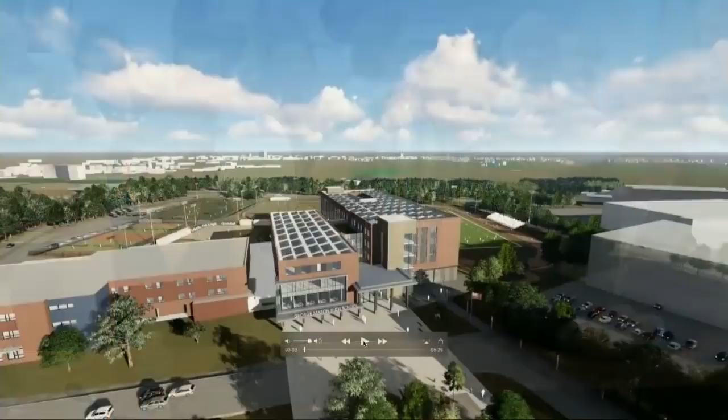This just looks at the building from the 5th floor apartment of the future mixed-use development. Looking at the building, you see the plaza there in front of the new high school.

That plaza extends into the good neighbor space, which is 300 spaces of parking required by the school, also could be shared by the development. We're hoping that at some point, if there could ever be structured parking, you could imagine a true community green space in that area where parking is currently proposed.

You can also see by leaning the road away from the school how much yard and frontage you actually create. Right where the blue stair area is, that's the current loading dock. By taking the loading dock out and restoring that to yard, you create more space between the traffic and the building.

All of that can be very nice queuing space for buses in the afternoons. So a lot of attention was given to the arrival and experience of coming and going every day by students, staff, and visitors, and the face it presents to the community in the future.

From a massing standpoint, the middle school is a 3-story structure, and the building is simply two academic bars, a very simple diagram. One is 4 stories and the other is 5 stories.

You can also see in this view all of the PV panels that would go toward making up that 25% power generation toward net zero. The new roof is kept clean to allow for all of those PVs.

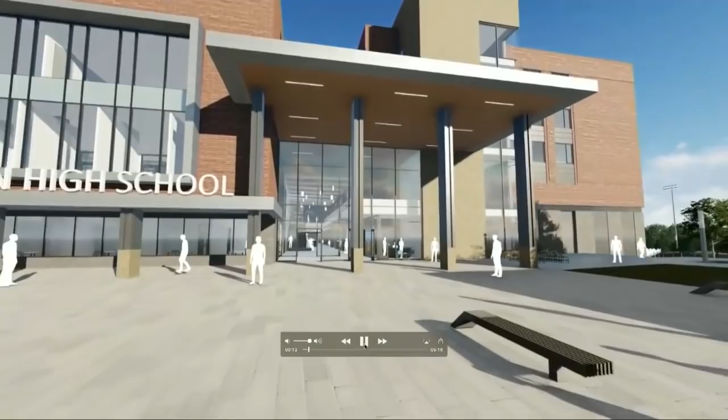Going through the main entrance, this is the main arrival for everyone, every day. On the left is the main office. All of this is ballistic glass.

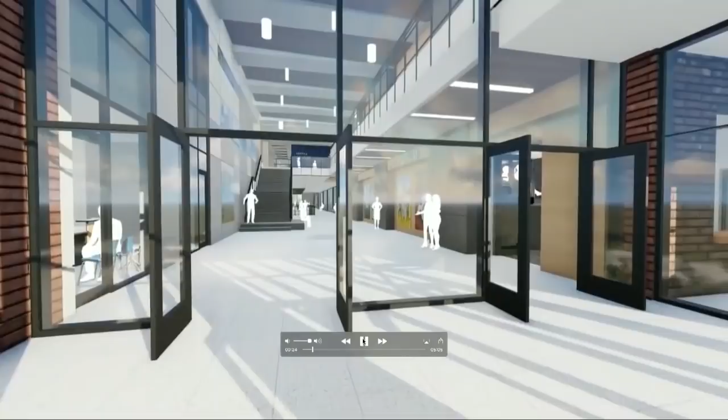We'll pause and say hello to the security officer. Go ahead. Someone's getting busted.

And then we'll go, and this is the heart of the school.

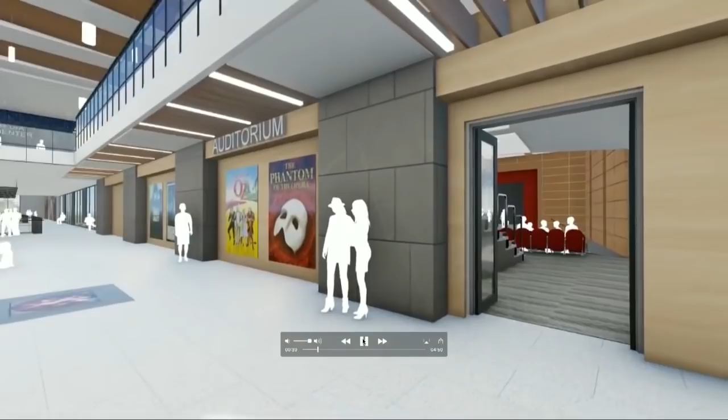We pay a lot of attention to the design principles put forth in the study, and I want to acknowledge the good work by Perkins Eastman as well, very nicely done. But we know the strength of the performing arts program in Falls Church.

So if you could just pause here, John. What you're seeing modeled here is the mezzanine. The mezzanine is an alternate to provide the additional 100 seats, so we're showing the mezzanine in this model.

And then if you would go forward, what we have done with some high schools recently is the back half of the auditorium can be treated as a flat floor.

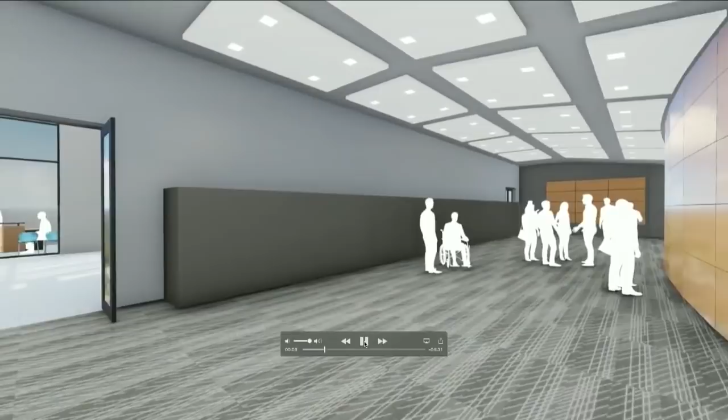With retractable auditorium-style seating, upholstered seats and backs that retract, you can use it as a flat floor flexible space, and close a partition so the forward half can be used for large group instruction while the back half is used for some other use simultaneously. That's what's in our proposal, using the auditorium in this way.

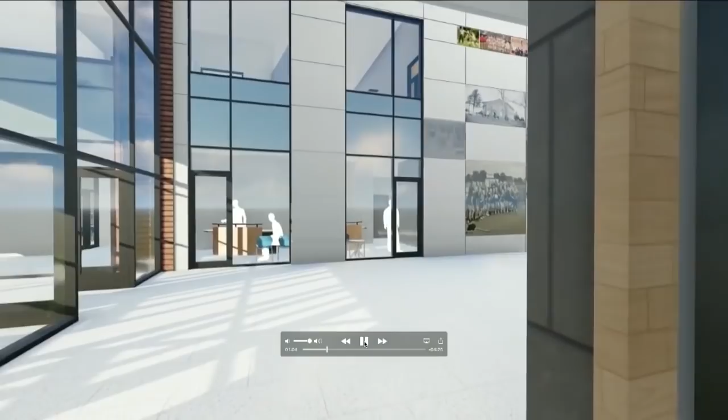Going back into the lobby, we know there's a great deal of history, culture, and legacy around athletics and academics. There's your...

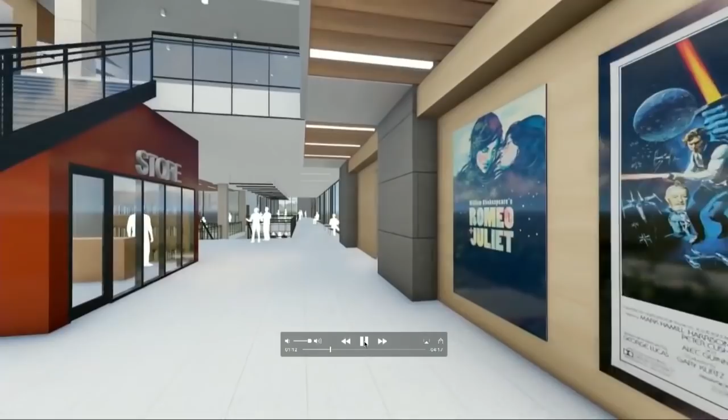Mustang medallion from the library. We'll come back to the legacy wall on the left in just a moment, but working our way down.

The main crossroads here at the main level, the elevator bank is right here on the right, and then just turning and looking back toward the middle school.

The Mustang Cafe, that's a grab-and-go scramble type food operation, backing up to a common food kitchen that would also separately serve a middle school serving line. So a high school and middle school serving line served by a common kitchen.

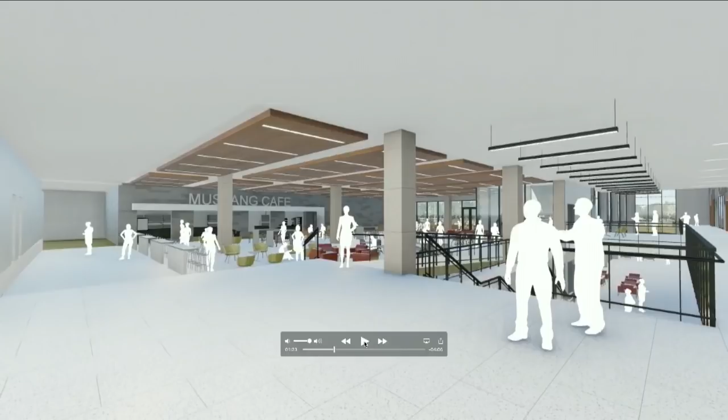And then we'll be renovating the middle school. We'll be moving the serving line to the vocal music room, and then renovating the serving line space for vocal music when we're done to make that all work. So it's very open, and then go, if you would, please.

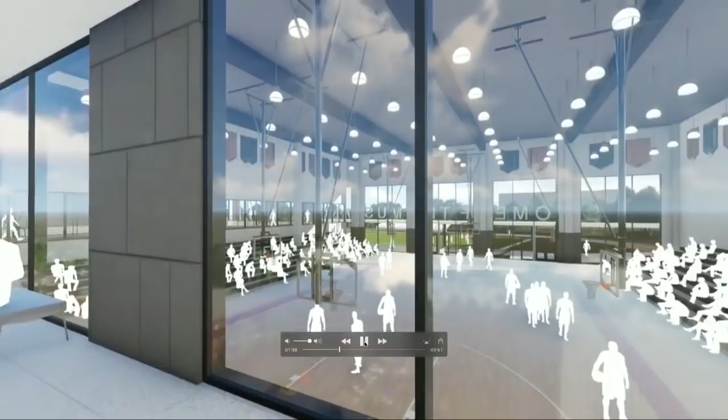And then we're looking at this point down one level into the competition gymnasium. You can see the stairs down on your left. It will look all the way through. You saw the elevation in the video that Jen just showed, but we're looking all the way through

the gymnasium north out onto the existing football field. And a couple of those banners, I think, are for boys and girls soccer and boys tennis this spring. So if we just continue down the way,

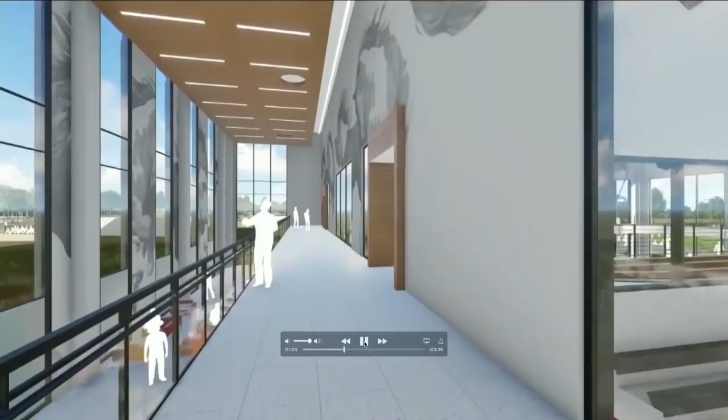the next space is the auxiliary gym with the elevated running track. Again, accessible off of this heart of the school. We'll just take a moment, take a look at that.

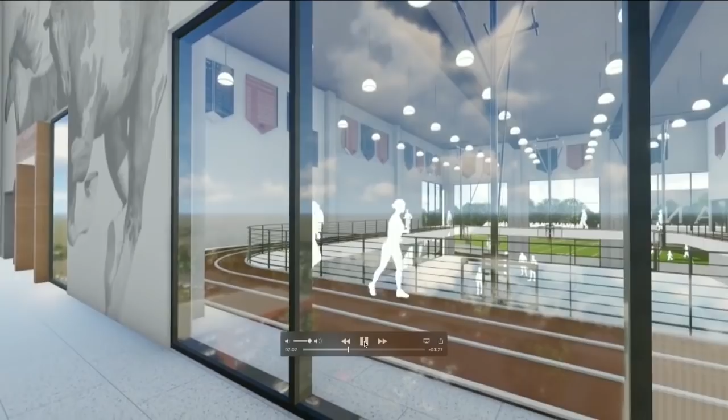Again, you can see right through all of this. You can see the branded graphics in this area of the building. Mustang Graphics. We're looking up to the makerspace that is on the second floor there.

So bringing back to the beginning, going back up now the stairs on the left, graphics, anything that would acknowledge the history of academics, the athletics, the culture, the history here in Falls Church.

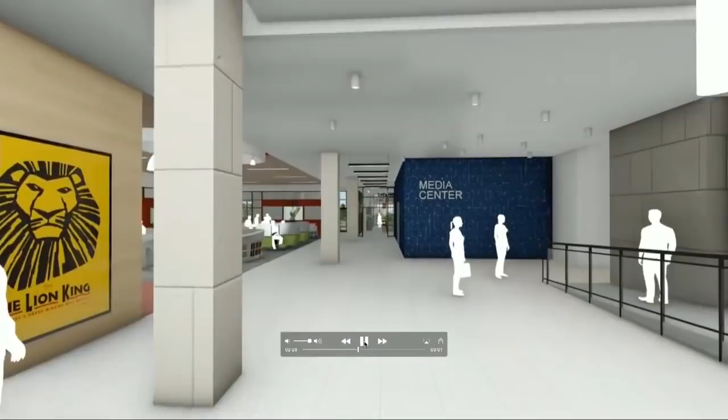Arriving here on the second floor, again, rethinking the media center as a more contemporary kind of a space. It's right over the cafeteria, so the glass there at the end could connect right down. This may be a place that might allow students to bring their lunch, for example.

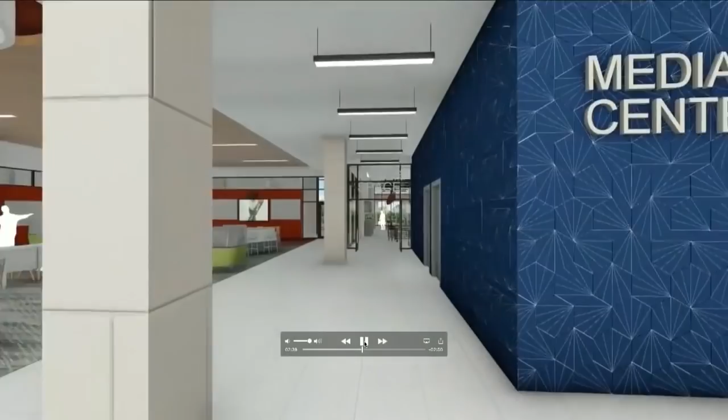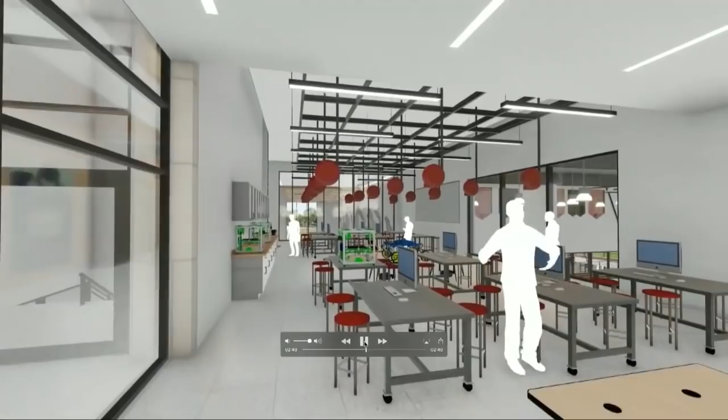Very accessible to the community. And at the end of this access, then again, still in the heart of the school, at the end of this access then is one of the two maker studios. So overhead cord reels, movable furniture, 3D printers, robots, drones, and still connected to the other activities of the school.

Athletics, looking back over that main floor heart of the school, and then on out to the athletic complex to the west.

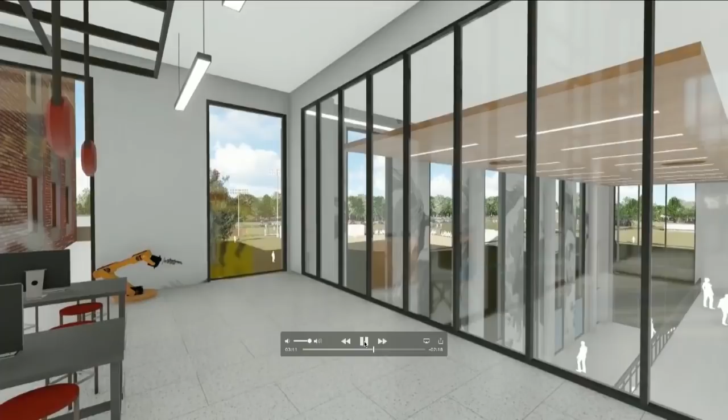Moving on to the third floor. This is the third floor, again, in the heart of the school, right on that main corridor. This is a feature we call the Learning Stair. It provides convenient access up to the fourth floor, but it also provides large group instruction and meeting space in the form of an amphitheater.

Looking back out over to outdoor learning space that connects to your STEAM labs on the third floor. Again, a collaborative learning space right in the middle of your building. Looking back out to the front now of the school, so if you can imagine out those windows would be the future community commercial development.

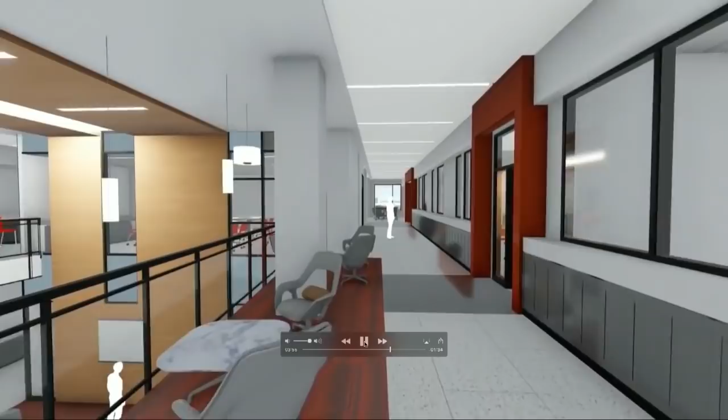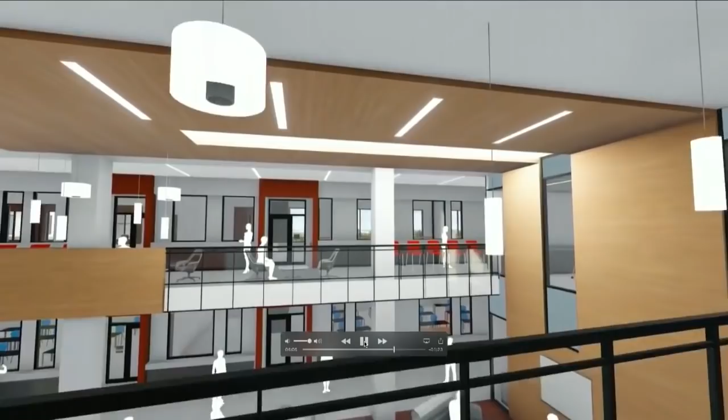This is on the fourth floor in that academic bar. All of the classrooms, great deal of visibility into the space. Half-high lockers below the windowsill, overlooking, and again, that's the third floor, double height space, so that you can imagine all of the various types of learning that you could have here and offer your students in a space like this.

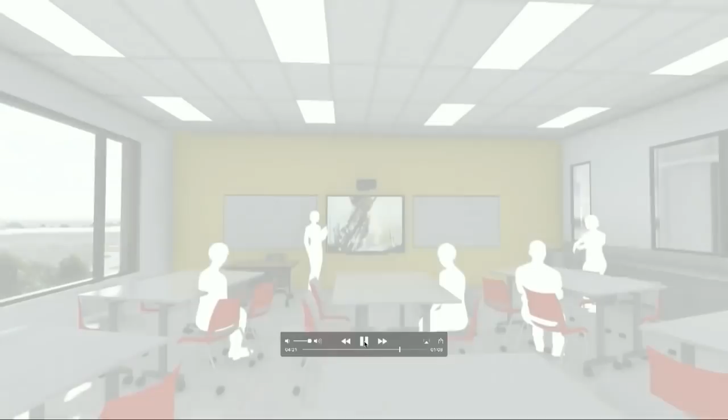You saw a moment ago a skylight on that fourth floor ceiling, and I'll show you that in just a moment. Again, typical classroom. I think we had a SpaceX launch going off on this day.

Again, lots of transparency going out. Now we're on the fifth floor, the highest floor of that northernmost bar. And a portion of this floor is depressed as an outdoor learning terrace.

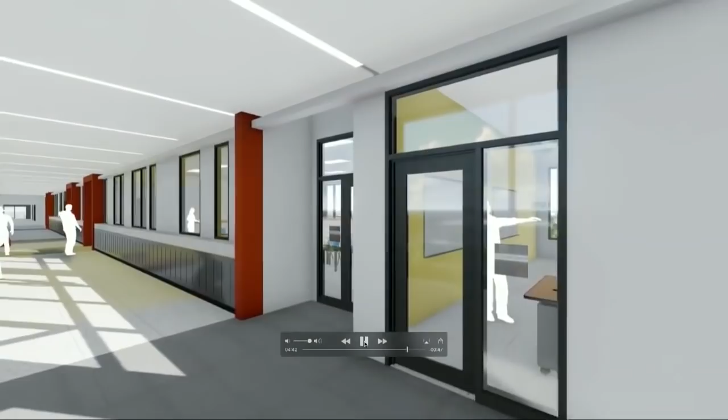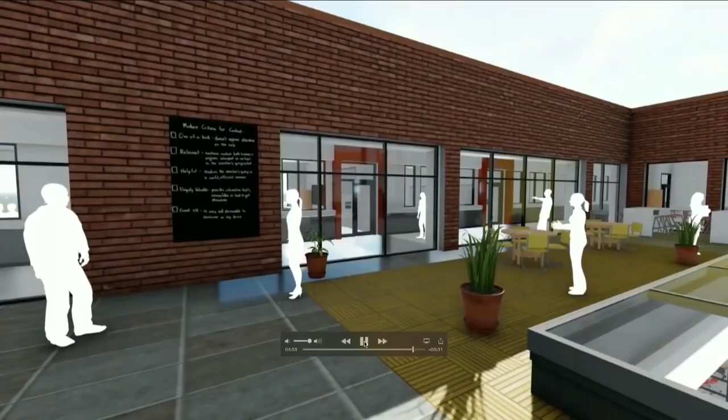Racetrack of classrooms that are around that central space, but you can imagine allowing students actually outside into that terrace, completely secure, for any number of things. In a space like this, there's that skylight bringing light into that third and fourth floor double height space there right on the right. So again, this is part of the fifth floor.

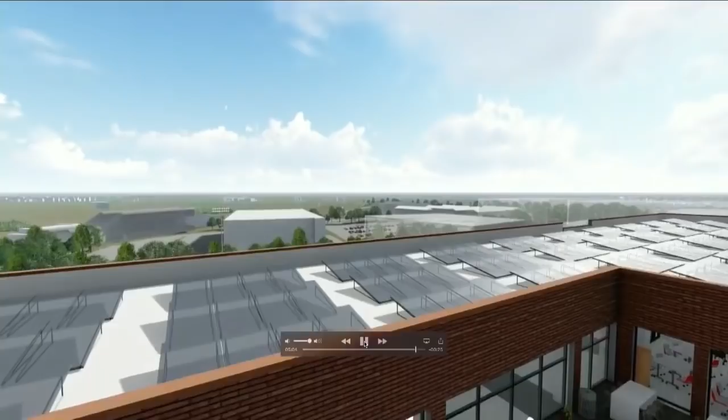And then if we just raise up and look back the roof, again, all of the PV array to get to the 25% generation. You see the overall massing of the building. It feels very compatible with the middle school. As the sun sets over our shoulder,

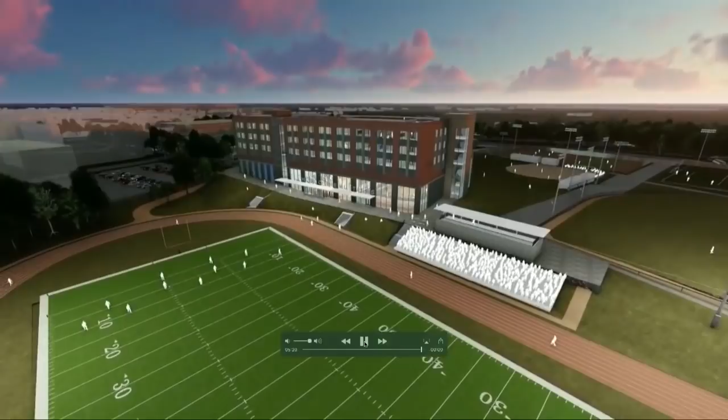The crowd goes wild.